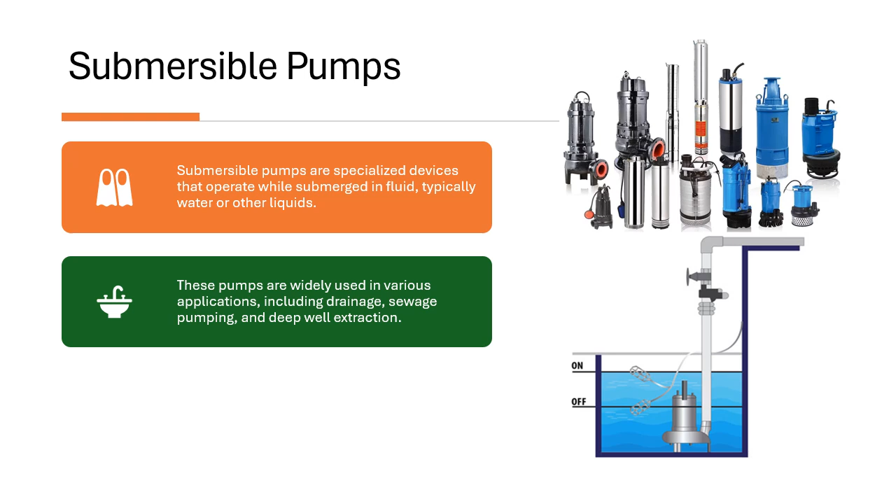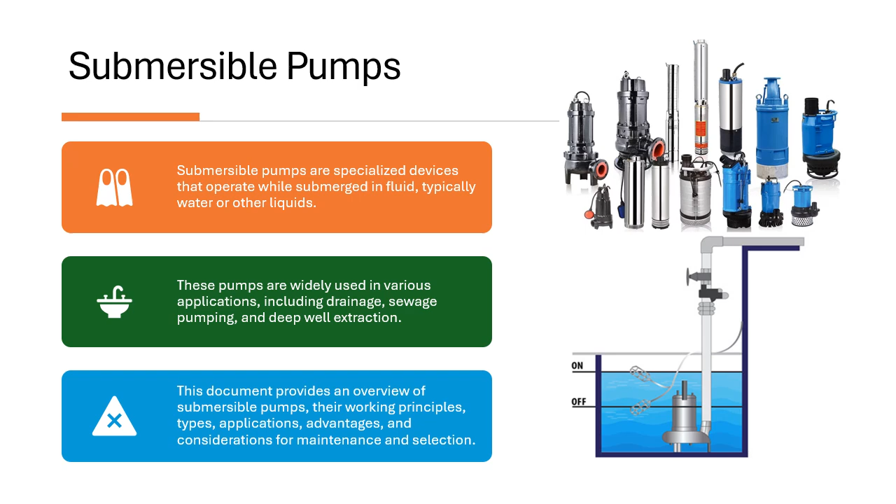Submersible pumps. Submersible pumps are specialized devices that operate while submerged in fluid, typically water or other liquids. These pumps are widely used in various applications, including drainage, sewage pumping, and deep well extraction. This document provides an overview of submersible pumps, their working principles, types, applications, advantages, and considerations for maintenance and selection.

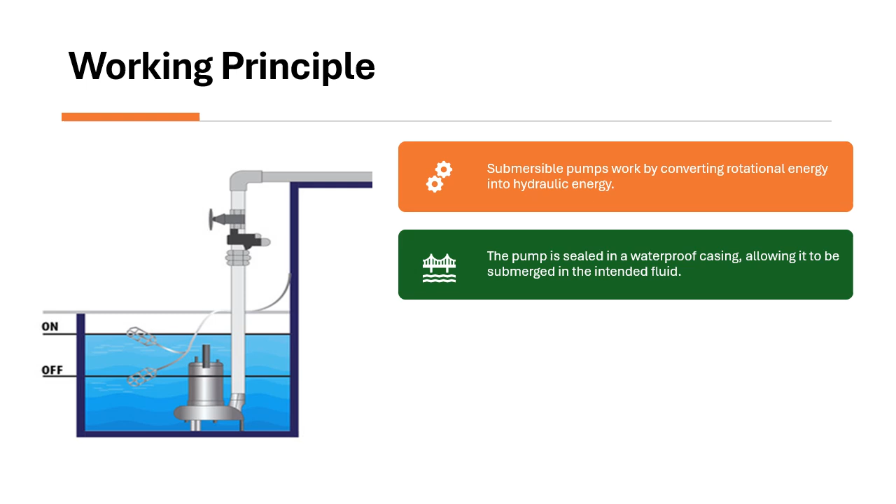Working principle. Submersible pumps work by converting rotational energy into hydraulic energy. The pump is sealed in a waterproof casing, allowing it to be submerged in the intended fluid. When the motor inside the pump is activated, it drives an impeller that creates a pressure differential, drawing fluid into the pump and forcing it out through a discharge pipe. This design allows for efficient fluid movement and minimizes the risk of cavitation.

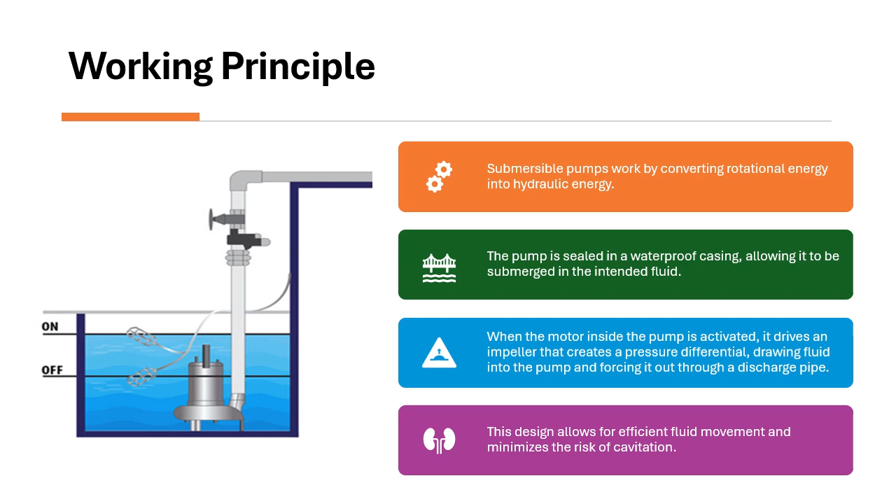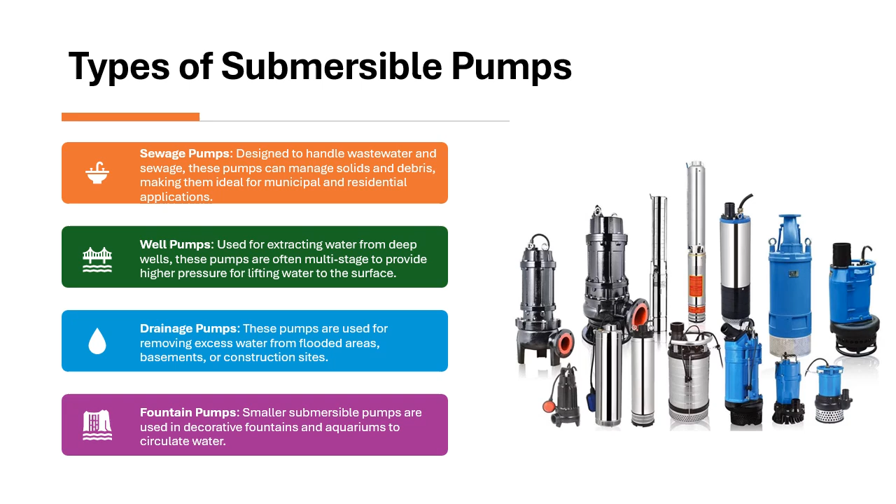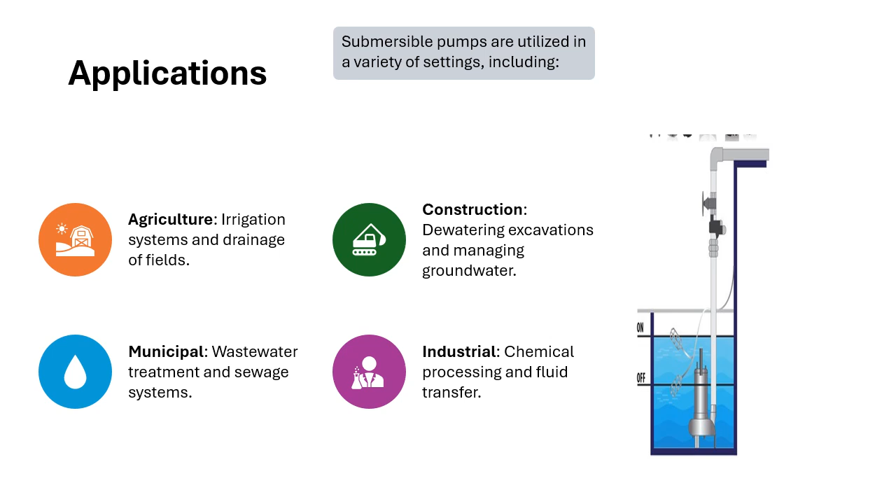Applications. Submersible pumps are utilized in a variety of settings, including agriculture: irrigation systems and drainage of fields. Construction: dewatering excavations and managing groundwater. Municipal: wastewater treatment and sewage systems. Industrial: chemical processing and fluid transfer.

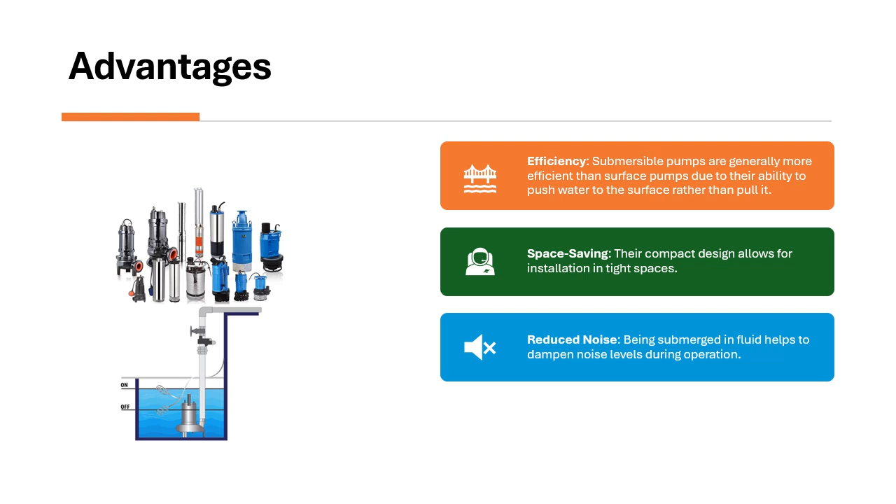Advantages. Efficiency. Submersible pumps are generally more efficient than surface pumps due to their ability to push water to the surface rather than pull it. Space saving. Their compact design allows for installation in tight spaces. Reduced noise. Being submerged in fluid helps to dampen noise levels during operation. Versatility. Suitable for a wide range of applications and environments.

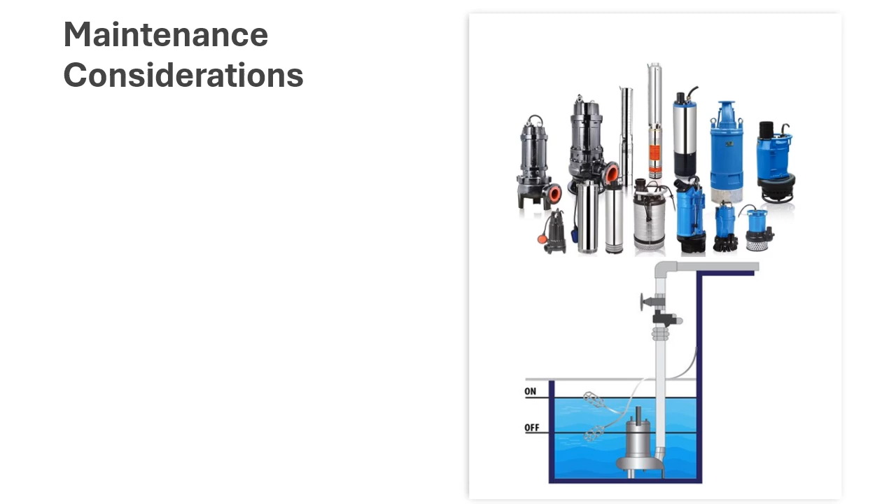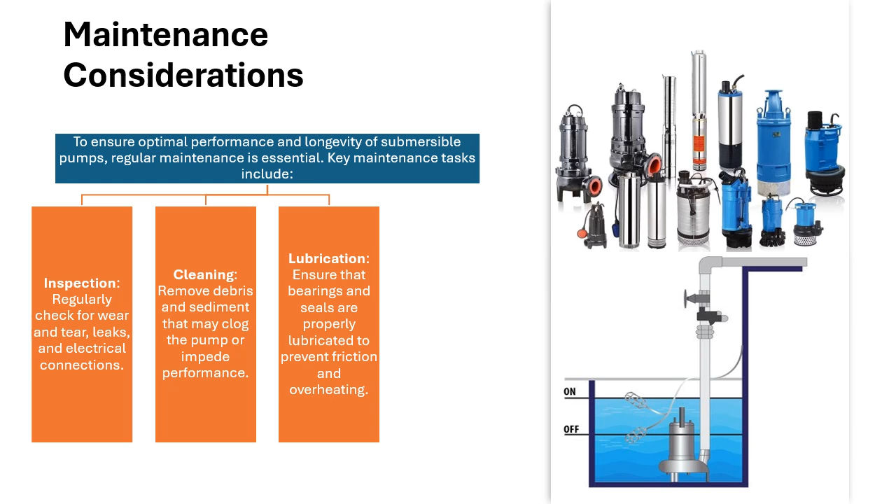Maintenance considerations. To ensure optimal performance and longevity of submersible pumps, regular maintenance is essential. Key maintenance tasks include inspection: regularly check for wear and tear, leaks, and electrical connections. Cleaning: remove debris and sediment that may clog the pump or impede performance. Lubrication: ensure that bearings and seals are properly lubricated to prevent friction and overheating. Testing: periodically test the pump's performance to identify any issues early.

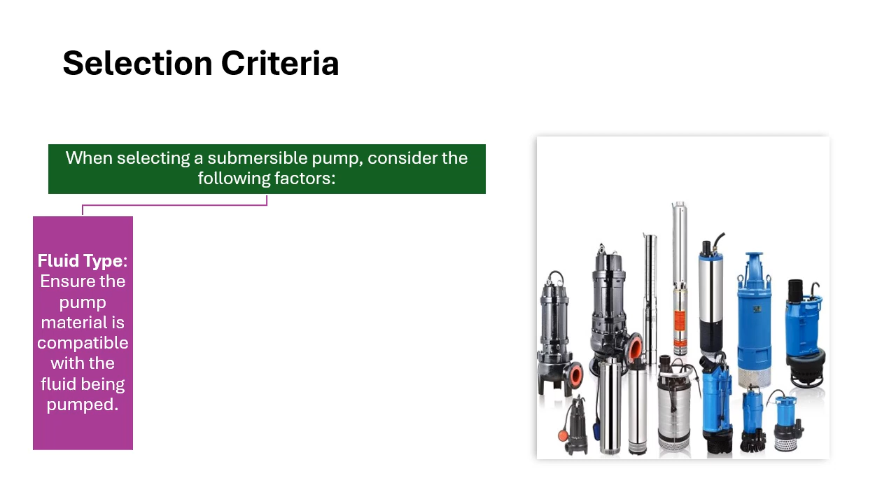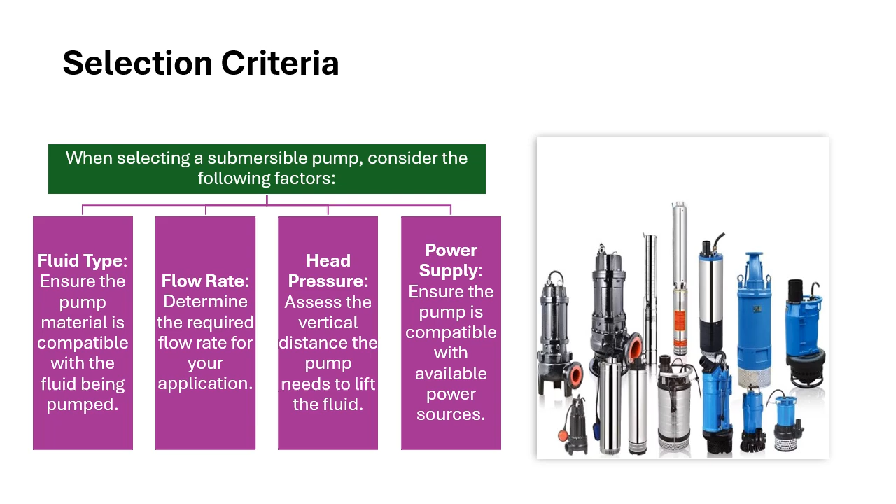Selection criteria. When selecting a submersible pump, consider the following factors. Fluid type: ensure the pump material is compatible with the fluid being pumped. Flow rate: determine the required flow rate for your application. Head pressure: assess the vertical distance the pump needs to lift the fluid. Power supply: ensure the pump is compatible with available power sources.

Bottom line. In conclusion, submersible pumps are essential tools in various industries, providing efficient and reliable fluid movement. Understanding their working principles, types, applications, and maintenance needs is crucial for effective utilization.